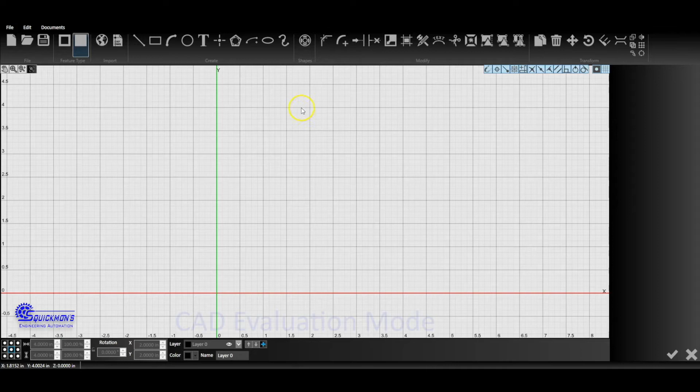First we're going to start by making our square the same way we would normally make it. We'll click on the square, click the origin, drag it up, and do 4, tab, 4, enter. Now we have our square, so I'll click escape to get out of the square command. Now I'll click C to get into the circle command, and snap it half an inch in and half an inch up from this corner. Now I'll click tab to give myself my diameter callout, 0.375, enter.

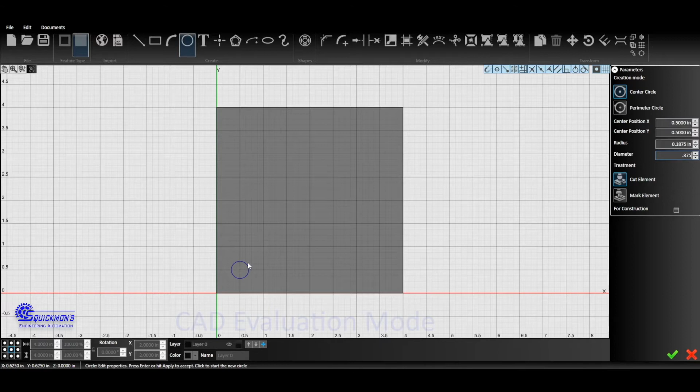Now that we have our circle that we're starting with, we're going to make a linear array of this circle to project it to this corner, the upper corner, and this corner here. So we're going to start by selecting the circle. Notice that it'll pick all 4 corners so that you can stretch this and do a few different things, but we just want to select it, and then go up to this corner here.

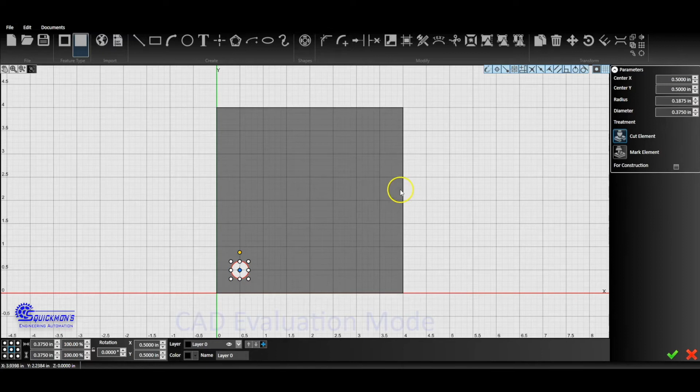See this little box, it's like a connected box. We're going to click that. It says linear pattern. Once we click it, you'll notice that we have our first circle wanting to snap 1 inch from the center line of this first circle. We're going to change that 1 inch to 3 inches.

The reason why it's 3 is because we have a shape that's overall 4 inches and we have half an inch on either side. Those half inches sum up to 1 inch, and we need to subtract that from 4, which is our overall length, to put these exactly at the same position on our plate. So we have that, but we also want a set of circles up above, exactly 3 inches above these two.

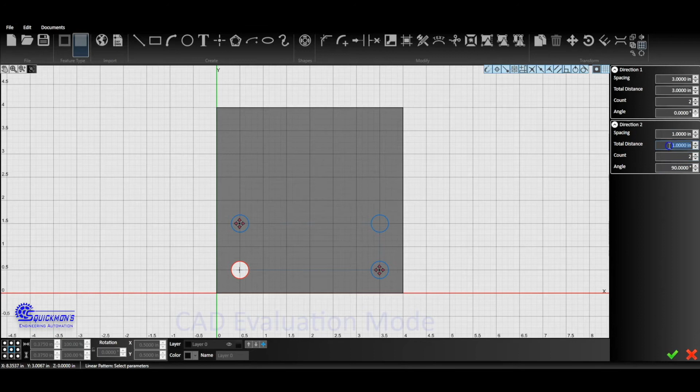So we're going to go here to direction 2. Now we're going to change the count because we want 2 instead of 1. So right now we have 1 row, we want 2 rows. Now we have 1 there, and we still have our total distance of 1. We're going to change that to 3, and now we'll click the check mark. And there we have it.

So this is how we would make a square flange. Notice our time in this video is actually a lot faster - we're only at 2 minutes right now. So that was half the time it took to make it the other way.

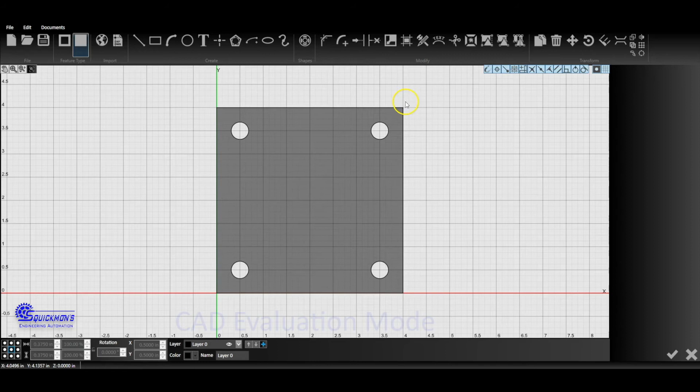Now we're going to go ahead and send this to CAM by clicking the double arrows. And now in CAM, notice that we're at the exact same place we were before. We can choose to edit these lead-ins by selecting this selection feature here. Go to cutout breaks, and we'll do arc.

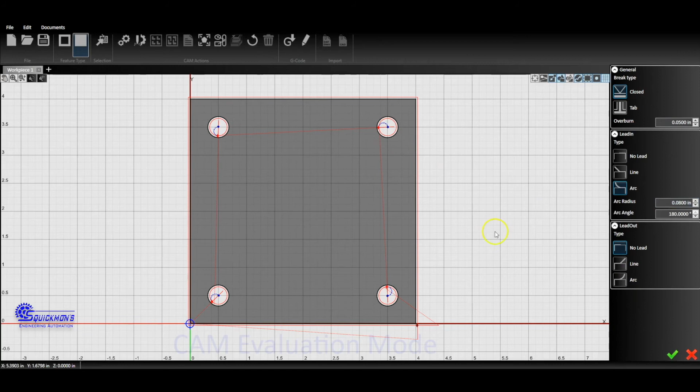We're going to do the same thing we did before, 0.08, which is 80 thousandths, and then we'll do an angle of 180. Once we do that, notice it puts us right in the center, and we'll click the checkbox, and now we'll click on screen. If we wanted to change this outer perimeter lead-in, we can click on that small diamond, and that'll allow us to physically adjust these blue dots here where we want them if we're using the Pro version.

But if we're in the standard version, we would just select it and move over to our side skirt menu, and then click an arc, and we can change that. So we lead in with an arc, we can change the arc length, we can change the lead out. This is whatever you would prefer, whatever gives you the best lead-in cut quality, so that it leaves a minimal divot where that plasma first starts to burn. We don't want it to get any overburn into our part. So you can slightly modify these things, maybe not quite 90.

Notice they're together there. If I make this 60, and I make this one 60, it pulls them a little bit apart, and then we can do 0.3 and 0.3, and we'll go ahead and check that.

Once we're there, that would be ready to cut. So we would just send it over to CNC, and we home our machine, zero the machine exactly where we want to cut, and we go ahead and click run.